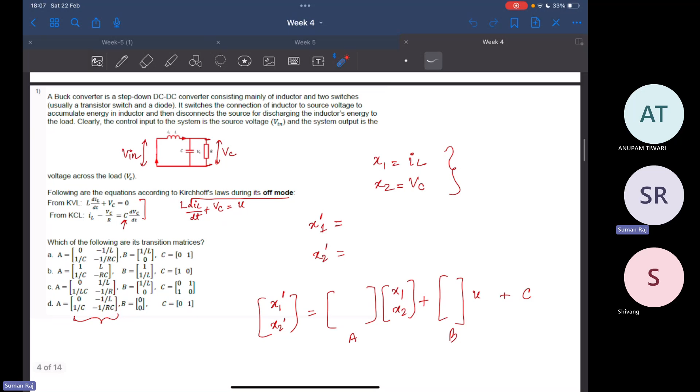Can you show the last assignment, because then we have to log out and then log in. Yes, here it is. Were you able to get this one right? This was from the paper that I had shared. Yes, ma'am. This is okay. Okay. How about this?

This, ma'am, I got wrong, because I said it is displacement, acceleration, and speed of mass. However, there are only two variables for energy stored. Right, we discussed this. Two variables are there: one is displacement, one is speed. Not acceleration, sorry, speed. Right. So this I marked wrong, but I understood after that. Okay. That is good at least.

What about this? This one is also wrong. That also is okay, I can now point out what is the error. Next one. This is also okay. This is also okay, ma'am. All right. Next. This is also okay. Yes.

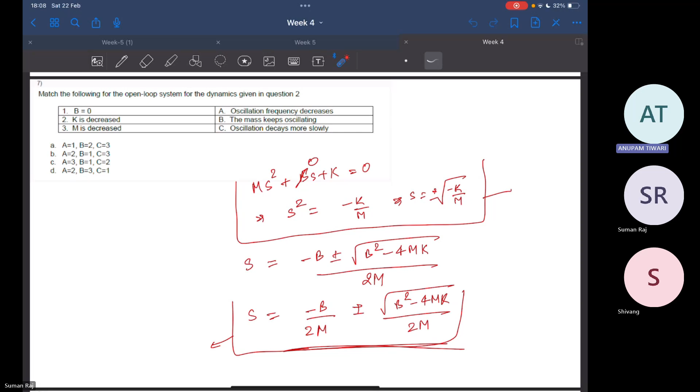Oh, both of you got different answers. Okay, let me check what is the answer that NPTEL says. Give me 1 second, I'll just check it. Week 4 quiz. Second last. 16. You got 16, right? And how much did you get, Anupam? 151. 161. 160. Okay, I think there could be some calculation mistake.

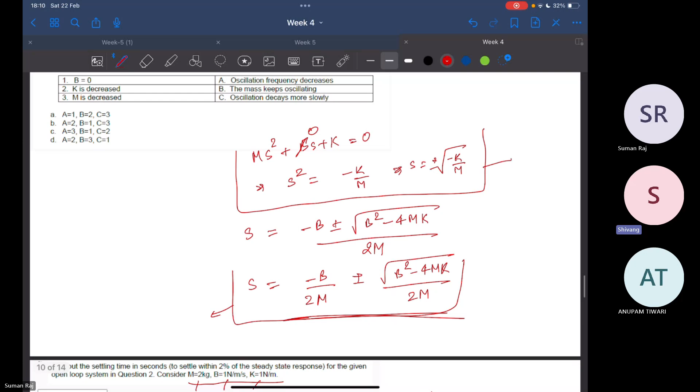Let me check. So this zeta value you actually take from here, right? What was the correct option in this question? Number 5. It was C, right? So let's see, under root k by m. Ma'am, I think it will be better if you just do it by comparing with the below thing. You don't have to calculate two things. S square plus 2 zeta omega s plus omega square. So 2 zeta omega is equal to that thing that we calculated there from the equation. This one you are saying? Yeah. So I used the equation and I just calculated from there only. You mean this entire part directly? Yeah. Okay, okay.

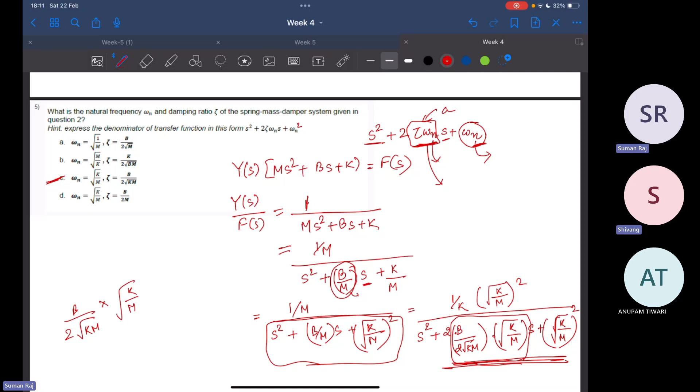So, ma'am, tell me one thing. Now, mass is in kg. So, yes.

What I converted into Newton. So that is why my answer is 10 times more. Oh, you don't have to. All these are in SI units only, right? I did that wrong. I multiplied 2 into 9.8. So no, you didn't have to do that.

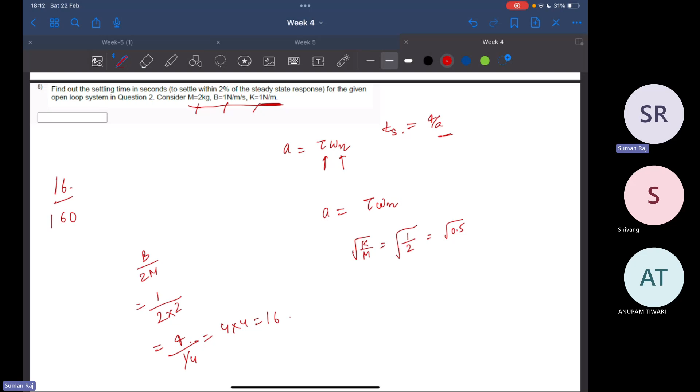Okay, I understand. Maybe you made it like mass into acceleration, like force. But over here also it is 1 Newton per meter, right? I converted kg into Newton, ma'am. 1 kg is equal to 9.8 Newton. Okay, okay. That was not required because over here also in this equation, we directly use what is there.

Next question, ma'am. It is just an error. Okay, sure. This is fine. Ma'am, this I could not solve. Okay. Shivang, you were able to solve? Yeah, ma'am. I was able to solve, just by the hint that you given, that I have to take the input, the state transition matrix for 1 by M comma 0. Hmm.

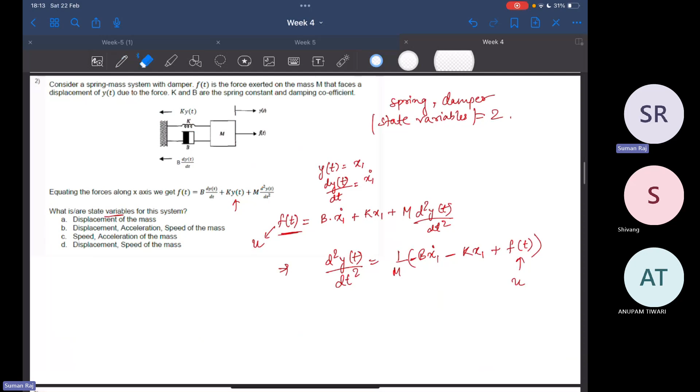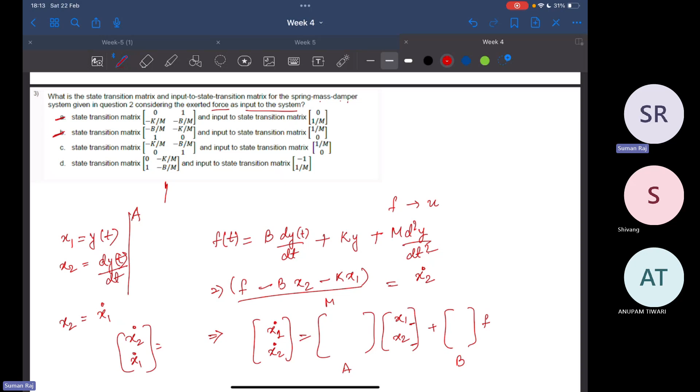Okay, so A is coming from our first, like this question number 2, right? So for question number 2, you were not able to get this right, and then that question got wrong. Okay, fine. So either A or B is the correct answer over here. So if we take 0, 1, minus k by m, minus b by m, right? And this is your B, I guess.

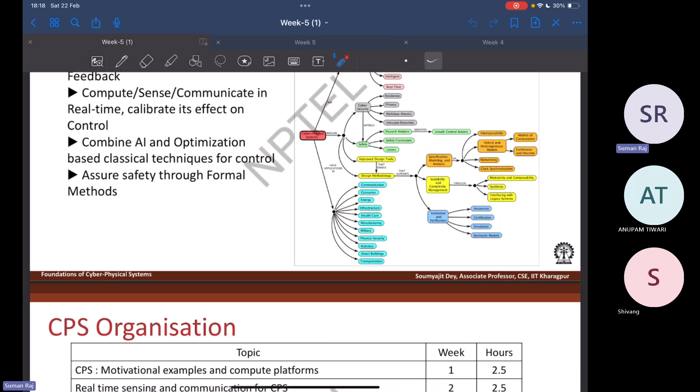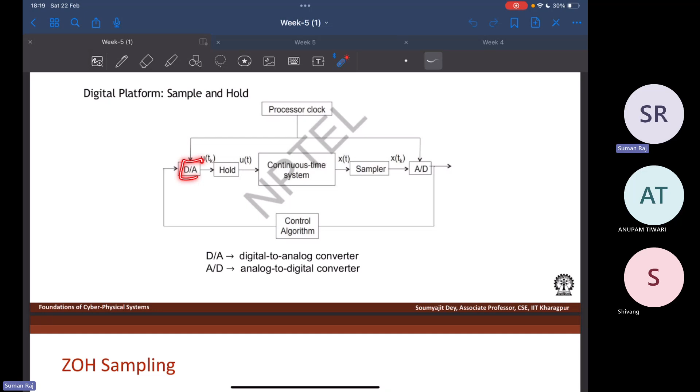Okay, so one thing is about this sample and hold circuit. So what happens is over here, let's say you have this analog signal, okay, and then that analog signal is held for some time, and then it becomes this continuous time system.

Then it goes to a sampler which takes this analog to digital. So what is actually happening is, let's say over here, this example is shown. Let's say this was your initial input. Now when you want to use your sampling, let's say this is the interval of sampling. So you want to sample over here, and over here.

So what happens is at the time you want to sample something, your system will just continue to have that value only. So this entire part until you extracted the next sample, for you the data point is the earlier sample, right? So in that case the values remain constant until you get the next sample from your input signal. So that is what is going on over here.

So this is called a zero order hold sampling, and this is a piecewise constant function. So over here this says that u of t, so this is u and this is x, and this is x of tk, which is continuous input, this is sampling at the tk time step, and then u(t) is your output.

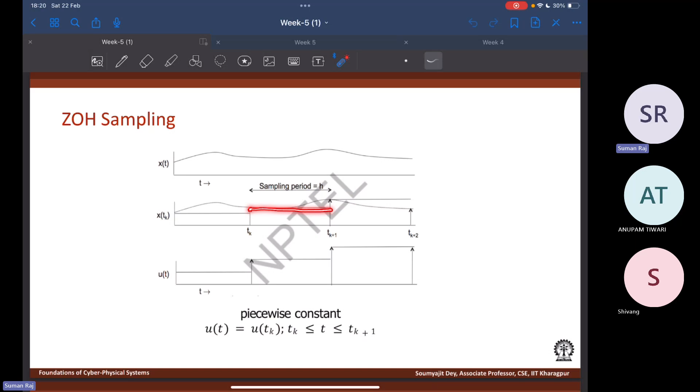So this is actually u of tk between tk and tk plus 1. So between tk and tk plus 1, whatever was your value, it just retains until then. Okay, so this was the concept of sampling.

Now, let's say d phi by dt is equal to A phi. So how do you represent phi? Phi is represented like this. Again, very simple thing. And phi of 0 is equal to the identity matrix. So e to the At is given as this. Can you tell me which formula is this? Taylor series. Yes. So this is your Taylor series.

All right. So now, given these kind of equations, we would have these for any kind of model, and you want to get the state space model out of it. So for any of these ODEs, we learned in our 11th, 12th class for integration that for any formula like this, you first calculate the integrating factor. Over there, we used to call that integrating factor, and now we call this multiplication factor, which is the same thing.

So that is calculated using this formula for any differential equation of this type. Similarly, over here we substitute this equation and this equation, and then we try to find a solution for that particular equation. I won't go in details, but I'll just cover that part. Now, the value of this u(t) changes only at every sampling period. So u(t) is equal to this for t between one sample and the next sample.

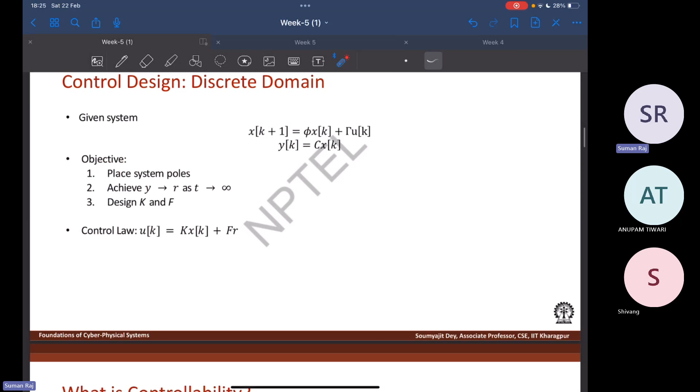Let's see, yeah, this controllability and observability. So in controllability, we say that a system is considered controllable if for any initial state x of 0, a control input u(t) can be designed such that within a finite time t, the state of the system reaches any final state x of t.

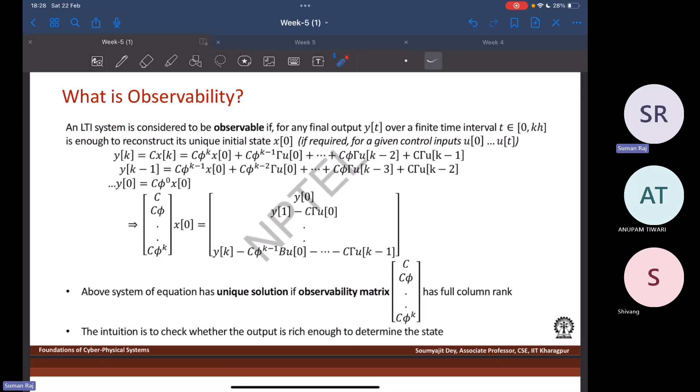Again, for the same thing, you just construct this particular matrix and check if it has full column rank or not. If you have that, then your system is observable. Some of these formulas are actually used directly in the assignment, one is directly there.

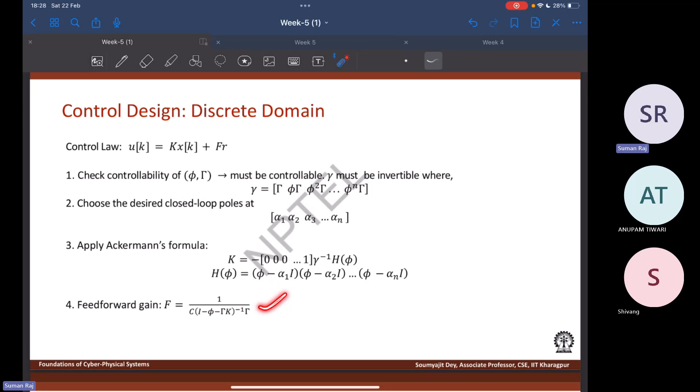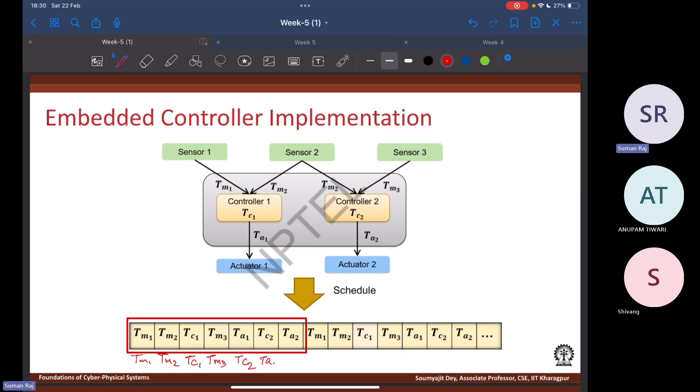The other that is also possible is, let's say, TM1, TM2, TC1, TM3, TC2, TA1 and TA2. This is also a feasible schedule. Okay, so this is how it works.

But if you want to say that this is how it is going to work, then you can assign that also. So if you are reading these two sensors and then you are calculating something out of it, then you are reading the third sensor, and then you are actuating it. But over here again, as I said, it's not depending on anything from your U1. So even if this TC2 comes over here, it doesn't make a difference. Okay, and then you have this actuation and then it goes back to the same stuff.

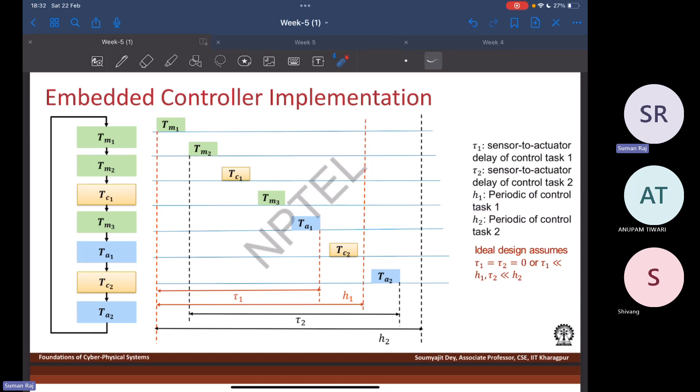Now again over here there is something called the concept of task triggering. So have any of you heard about event triggered designs or something like that, or event triggered mechanisms?

Yes ma'am, in industrial engineering, I will give you an example. Suppose temperature reaches certain degrees, then the actuator will switch off that valve, like that. So once that temperature is reached, then that will trigger the other mechanism. Correct. Yes, that's what is event triggered.

So now over here, what we say is that TM and TA consume negligible computational time and they are time triggered, right? TM is like sensing and actuation, but the major thing is this TC. Okay, so this TC needs finite computation time, which is basically your computing, and is event triggered and preemptive. So this is time triggered because you can say that I want sensor data at this time point, or basically your samples, right? But unless you have your sensor data, you cannot start a compute task. So that's why this is saying that this is event triggered, because this is going to start only when this comes in, right? And when multiple tasks are running on a processor, you can be preempted by a higher priority task. That's what we have studied earlier, that if you have different IDs of tasks, the one that has a lower ID gets the higher priority, and that is just for the CAN bus, but there can be different kinds of priorities for different things.

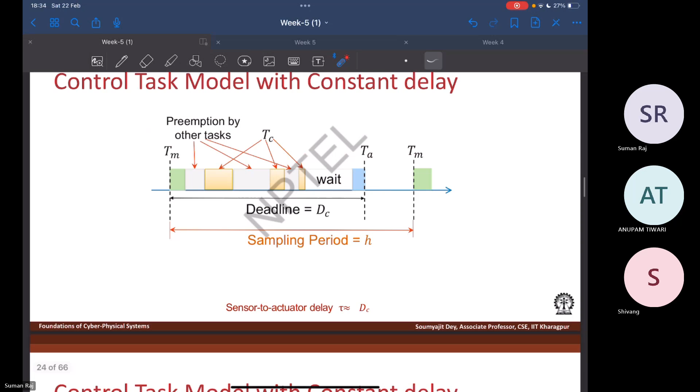Okay, so there can be some with constant delays. You can go through it, but we'll come back if there is any question related to this.

Signals defined. Yeah, I think we can go through this one.

So let's say this is your x of t, like this, the wave, and these are your sampling periods. Okay, so at this point, when your wave was at this, so you are retaining this value. Okay, now again you sampled over here, the value reduced, and then you sampled over here. All right, so now, based on this, you have a TK, you have a TRK, and then you have a TK plus 1. All right, something like this. So this is your deadline of the task, computation task, I think. That's what is DC, right?

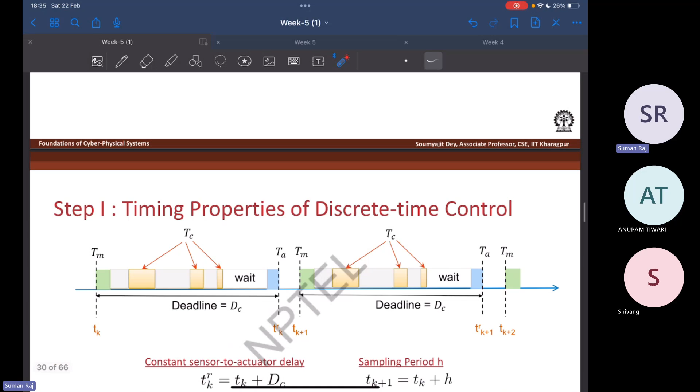DC is supposed to be, I guess, the sensor to actuator delay. So your deadline is equal to the sensor to actuator delay.

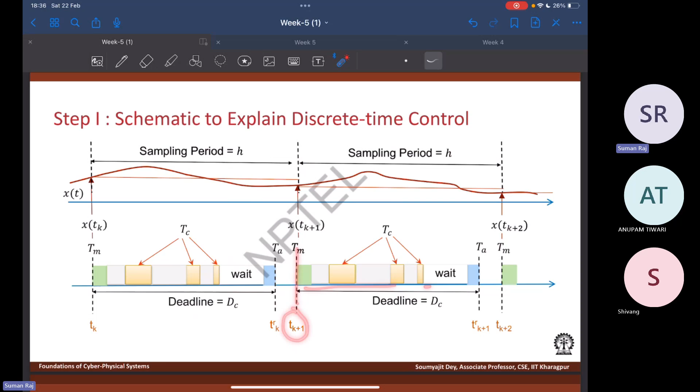So this is your actuation time and this is your sensing time. In between you have your computations, and then you wait for some time before you actuate your actuator. And then at the next time you get your sample and then you do all this. This keeps on going.

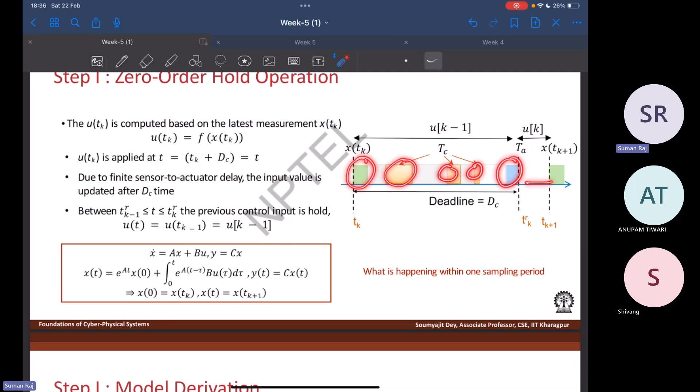In the case of zero order hold operation, it's the same thing we studied in the first two slides - whatever is there for the previous step, and then this is for the next step. That's how we put it over here. This just shows what is happening within one sampling period: you have sensing, different computes, an actuation, and then there may be some waiting depending on how heavy your compute is and what kind of device you are using.

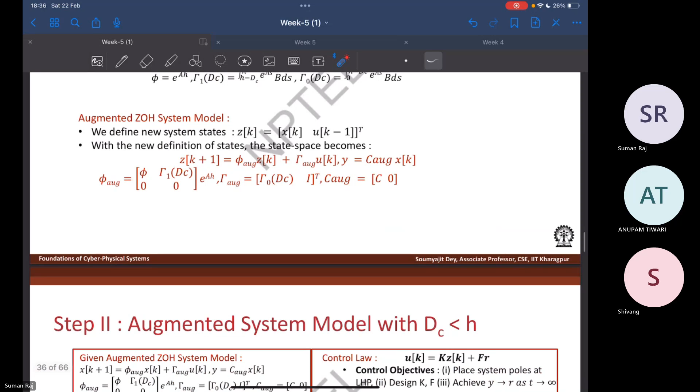Okay, so these are fine derivation, we can skip. What all is there? Yeah, this is probably required.

So let's see this augmented system model where you have the delay less than your sampling period. In this case, what you do is your x of k plus 1, that is equal to phi of xk, plus this is your gamma one, and then plus this is your gamma naught. And then you have y is equal to this.

But when you want to augment that particular system, you say that your z of k is equal to x of k and u of k minus 1 transpose. So that comes from here. With these new definitions, you just change the state space, and then that's how you redefine the variables.

I think there is one question specific to this particular slide, because the question is asking what is the feed forward gain or something like that. We'll come back to this because we anyways have to go through it.

And then again over here, let's say you have a continuous time system, and this is your state space. So you have x dot is equal to a of x plus b of u, right? And y is equal to c of x. So this is your a, this is your b, and this is your c, right?

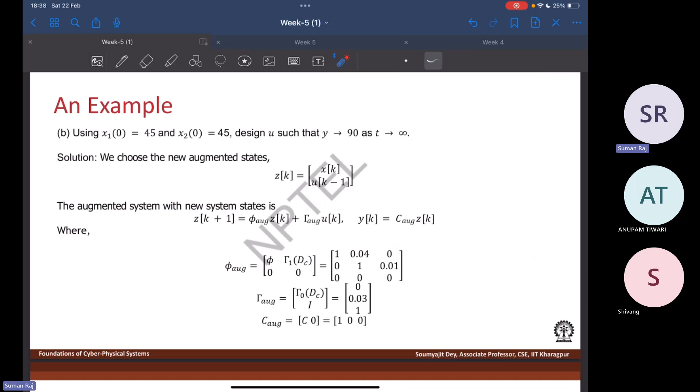That's your system model, and then augmented states is calculated. I think we should just keep it for now. These are all examples. Okay, let's go back to the question.

So any doubts up till here? Something that you want me to discuss specifically before we start discussing the assignment?

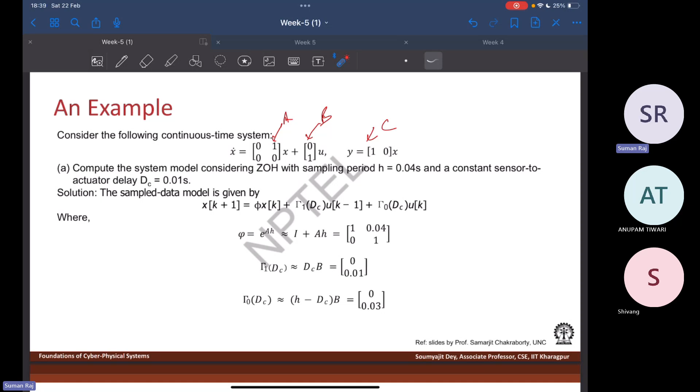Okay, if there is nothing, let's go to this. So this is another question. Last time we had buck converter, right? DC to DC.

Similar to this, what we have to do is we have to take one variable as the current in the inductor and the second variable as your voltage on the capacitor, as these two are your energy storage elements. Depending on this, let's see what we can do.

So there is this very nice article. I would suggest you to go through it and maybe save it. Over here, probably go specifically to this question number, example 3 on page 9.

So that's a slightly changed circuit. You have a resistor, you have a capacitor first, and then you have the inductance in the PDF that I just shared. Are you all able to open that link? Yeah.

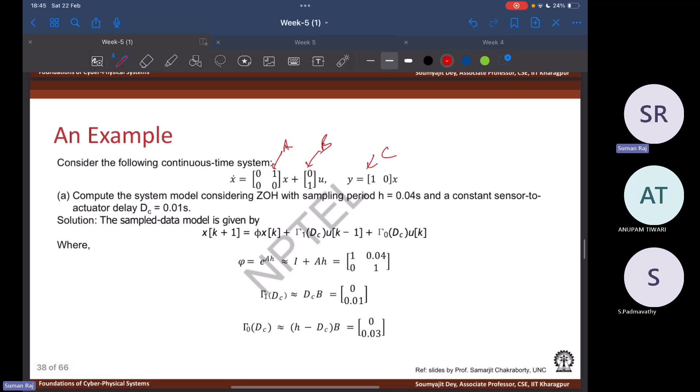Let me just check one thing. Continuous time, state space. So that is given by

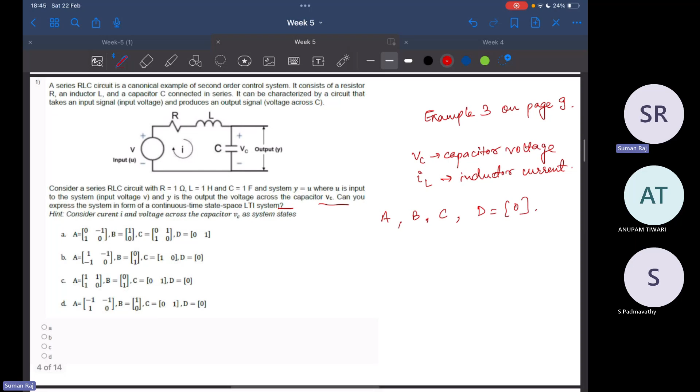Okay, so the next question says: discretize the above system for a sampling period of 100 milliseconds, and which of the following represents the state space of the series RLC circuit system. So it is for the same question, but we have to discretize it now. So what do you have? You have x dot is equal to Ax plus Bu, right? And what was the equation of your phi?

It is actually from here only. So this part. Okay, so this is your e of At. So your phi is given as e of At, which is nothing but I plus At plus A square t square by 2 factorial, and it continues, right? And then this is B by A, e to the power Ah minus 1, right?

So now, what is your sampling period? It is 100 milliseconds, but in terms of seconds it is given as 0.1 second, right? So you will calculate your gamma first. e to the power 0.1 into A minus 1. Yeah, so I think if you just go through slides 8 to 11 exactly, that's where it will solve this for you.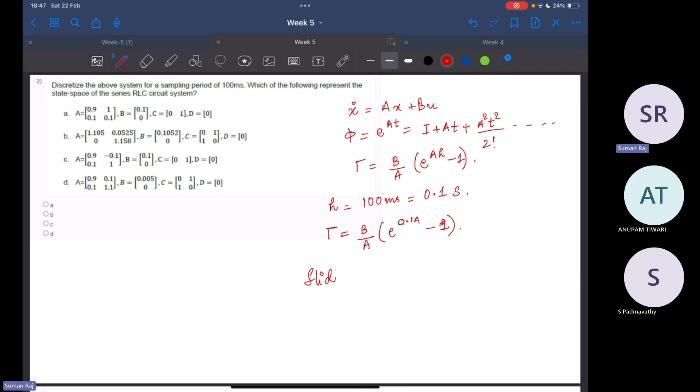Okay, this week's assignment is a bit tough, and you would need to refer to the lecture again and again because it's more like mathematics and all those equations are involved. So you would have to go through each step over here. So in the case of this x dot, you need to get this multiplication factor first, and where will you get this from? You get this from question number 1's answer.

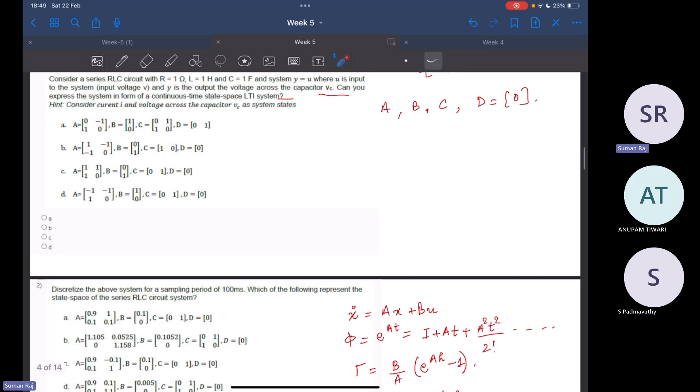This is slide number 8, 9, 10, and 11. Okay, so that's how you discretize your question. So you have to put it in this format. And gamma we can take approximately B into h? B matrix into h, yes, you can do that. So I think whatever B you got from here, you can just multiply that by h and you can get the answer. Is this okay? Yes. Okay.

So let's go to the next one. It says given a final state of the above series RLC circuit system after t units of time. So after t units, you got to a final state. Okay, so is it possible to conclude a unique initial state for a sequence of input signals? So what does this definition talk to you about? It talks about controllability,

right? Because over here we say that you have x is equal to 0 at t is equal to 0, right? But after a certain point in time, you reach your final state. Like this is your final state. And this time is actually a finite time, right? So over here the question is the same. You have a final state after t units of time, and this t is your finite time. So is it possible to conclude this?

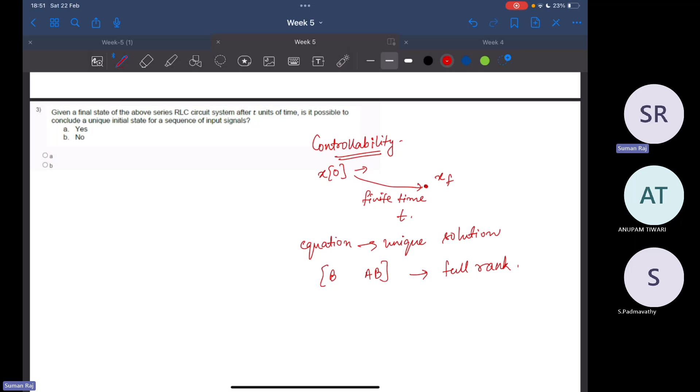So if the question says, is it possible to conclude a unique initial state, which means that the equation should have a unique solution. And what do you mean by unique solution? It means that the controllability matrix, B AB, should have full rank, right? So you would need to calculate on that basis.

So you get the B from the above equation, like this one over here, and you get the A from the top, and then you multiply that. So the first one will remain as it is, the second one will become AB, again a 2 cross 1 vector, and then you have both of them, and then you calculate what is the rank of that particular matrix. Okay.

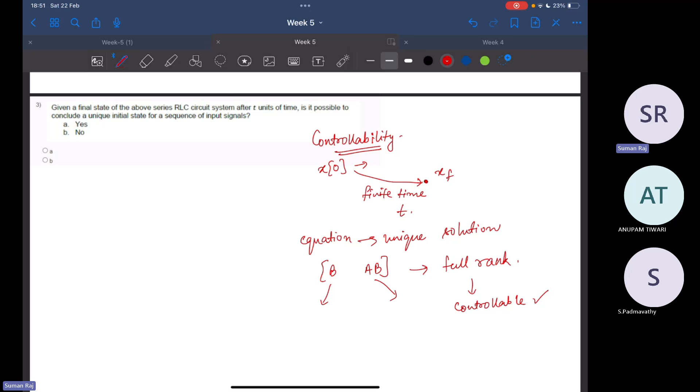I mean, this we have to take the first one or the discrete one? Take question 2. Hmm. I would say take question 2.

Or maybe try with both if you are very doubtful. Okay. No, because the time t is continuous, so it is not tk plus 1 or tk plus n. So I think one will be okay. No, but it says t units of time, right? There is the concept of units. Okay, we will try with both. Prioritize whatever you get from question 2, and then check with question 1 also. But very likely you should be able to get your answer with question 2.

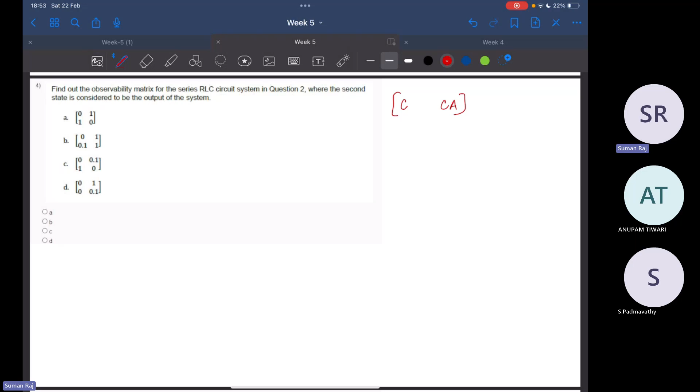Okay. So again, the same thing. You have to get the observability matrix for the series RLC circuit in question 2, where the second state is considered to be the output of the system. So here you have to get this C and CA. You have to get the transpose of that. Okay, no, this is just the matrix. So you just calculate the matrix of this. This is your observability matrix.

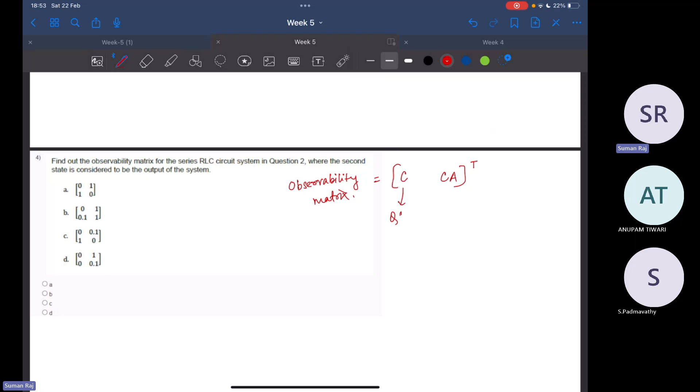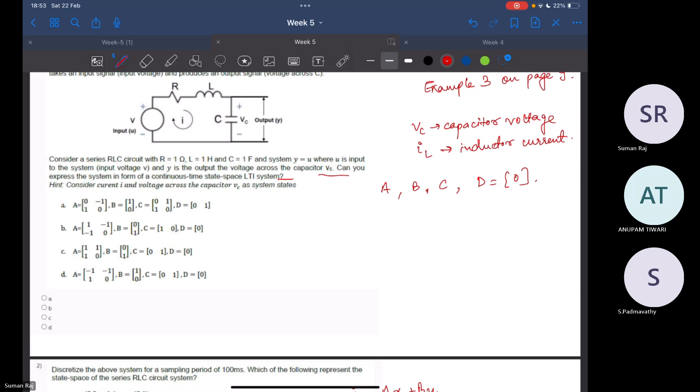So C will come from your question number 1 because it did not change in question number 2, right? When we were changing it. So over here, I think C and D don't change. It's just that your A and B only change. But just confirm once when you solve it. Okay. So your C and D will come from question 1 directly. And this A comes from your question 2.

Okay. So let's see this. Consider the following trajectory tracking control system for a vehicle of mass m that tries to minimize its deviation x from a certain reference distance by exerting certain input force u to overcome the equal amount of force inflicted due to friction. But due to the wind drag and rolling resistance, the vehicle faces a backward resistive force Bv, while the vehicle moves forward in v velocity due to the force applied. Obviously, the equations are simplified and complexity that arises due to powertrain is omitted. So you have been given a mass and a b, so you have to find out whether your system is stable in open loop or not.

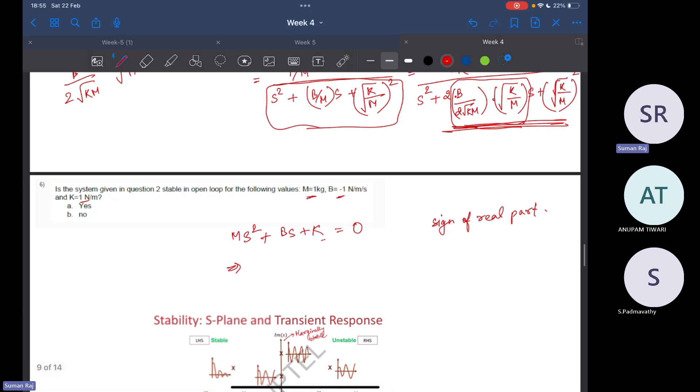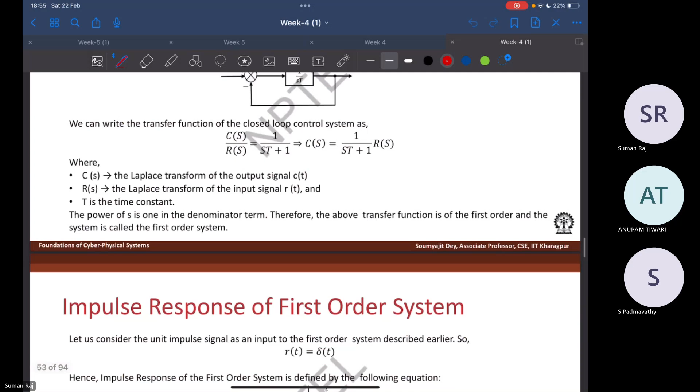Have you seen this equation somewhere? We solved this in the last lecture, right? Let's see where this is. It was a similar one. Okay, I don't think the car one is here. It was probably in the week 4 lectures. Let's just check once. This is the same question, right? So what is the slide number 9?

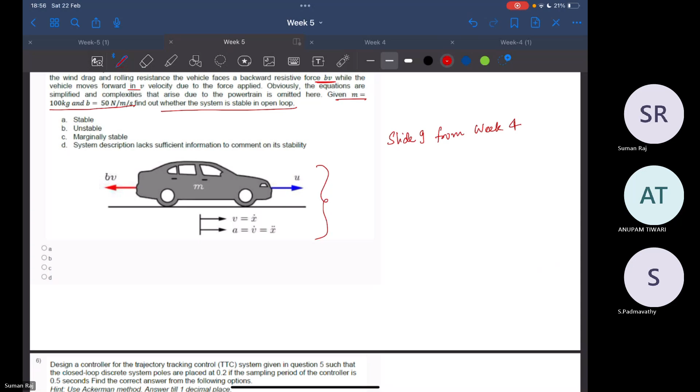Okay. So what happens over here is the same thing. So you have Bv, which is the friction force. Your mass is m, and then you're going at a speed of u. It's the exact same thing, right? So now that you have these equations, let's see. So your equation is mv dot plus bv is equal to u. What is the other one? Your y is equal to v, right? So now you have to just check if your system is stable in the open loop.

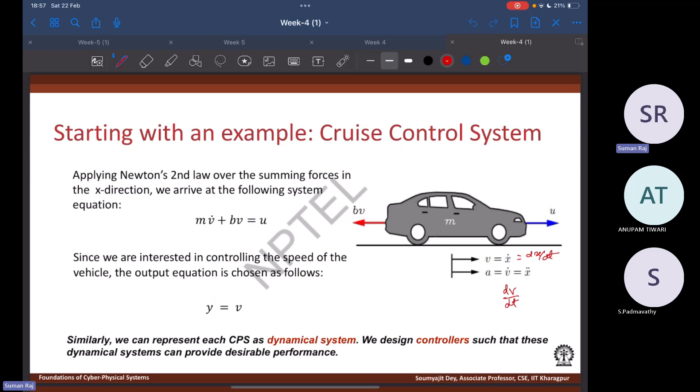So by stability, what will you have to do? You will have to go through this Ackermann's formula, right? Or maybe let's just see. So if this is your mv dot, which is basically mx double dot plus bx dot, that is equal to your u, right? And given this equation, last time you already solved it. It is probably here somewhere. Should be in your notes. Okay, so what do you have over here?

Your x1 dot and x2 dot, that is equal to 0, 1, 0 and minus b by m, times x1, x2 plus 0, 1 by m of u. Okay, and then your y is equal to 1, 0 of x1, x2 plus 0 of u, right? So this is how we got it. And over here, what do we say? My x1 is equal to x and my x2 is equal to v.

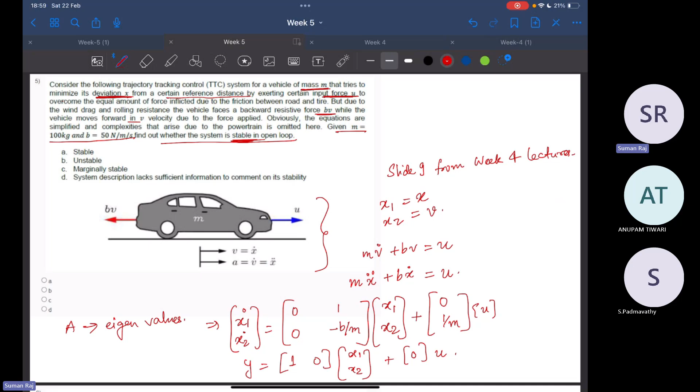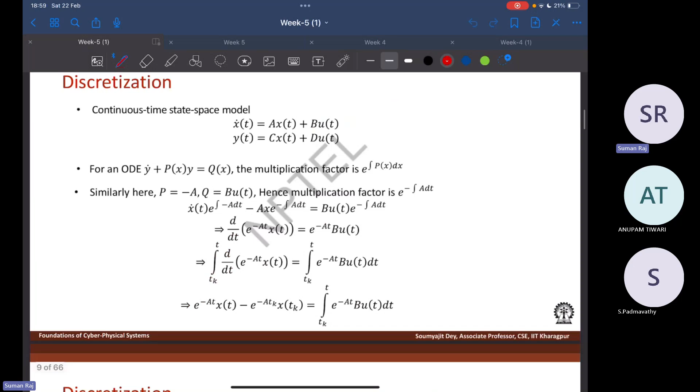Okay, so if this is your equation, you can try and get the eigenvalues for your equation. So get the eigenvalues of A and try to see what is the value of those roots. Okay, and then once you have that, try to do this circle analysis that we had. Where was that? It was somewhere here only. Yeah, this one. Okay, so then you do this discrete time system analysis and you should be able to get the answer.

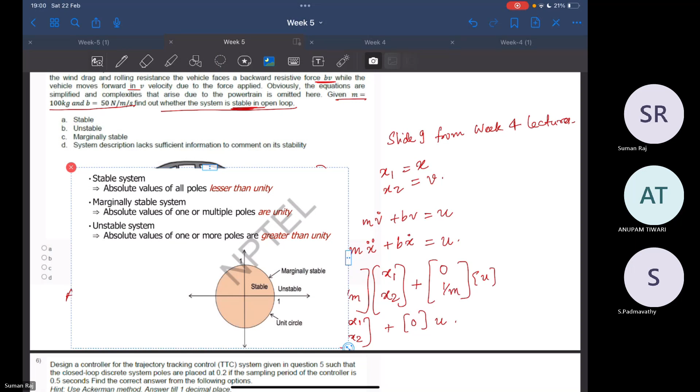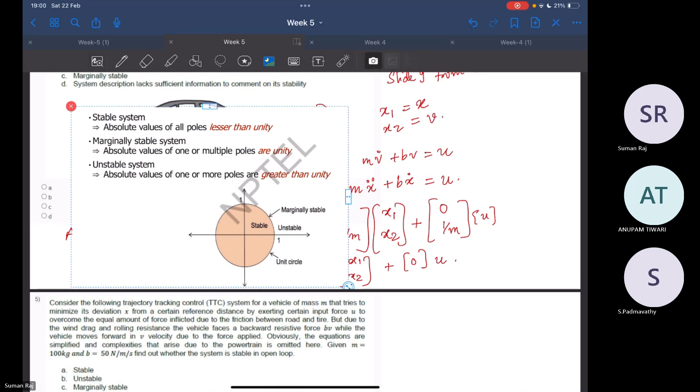Okay, so I'm putting it over here. Is this okay?

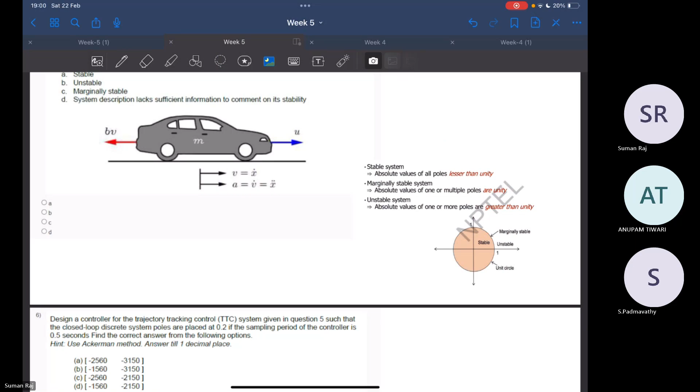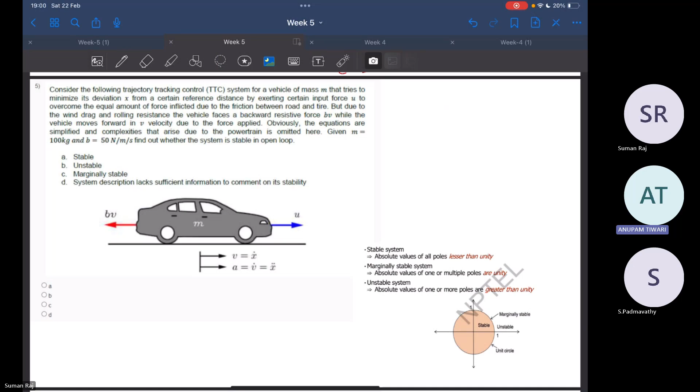This is an analog system. If we take A, what you've decided. So with A we can calculate whether this is stable or not. Yes, if we say A is 0, 1, 0, minus 0.5, so we have to calculate these eigenvalues. If they are less, then it's stable. Correct, yes.

So once you get your eigenvalues, then you get the max of lambda 1 and lambda 2, and if that is greater than 0, then this is going to be unstable. All right. Yes. Okay.

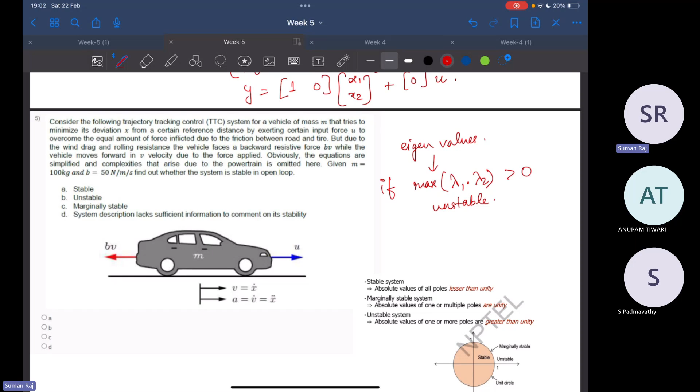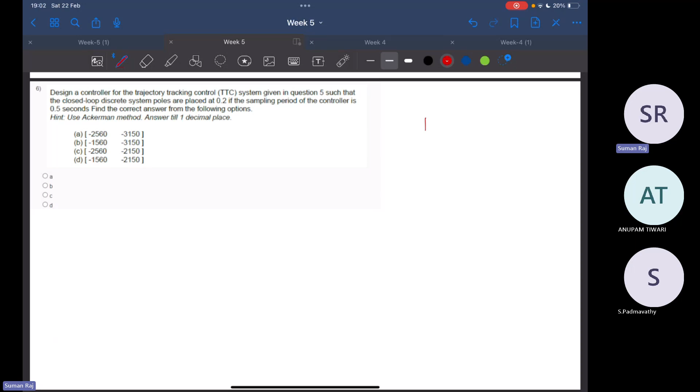Okay, so let's go to this question. It says design a controller for the same system given in question 5, such that the closed loop discrete system poles are placed at 0.2, if the sampling period of the controller is 0.5. Find the correct answer from the following. So what do we have to find? We have to find K.

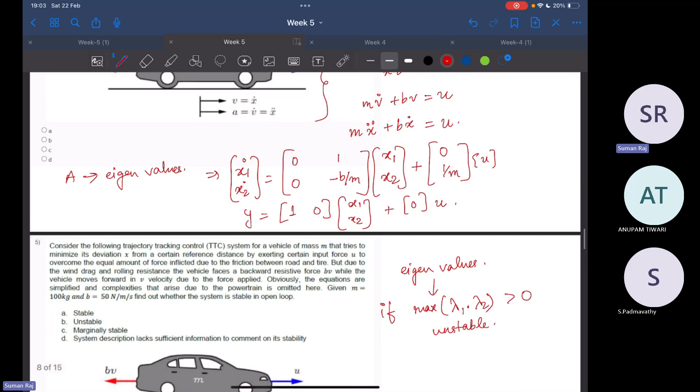Okay, no problem. Let's see how we can go about it. So you have x dot is equal to v, and v dot from m into x double dot plus b into x dot is equal to u. So you would get minus 0.5 into v plus 1 by 100 into u. If you write that in this format, it is 0, 0, not minus 1, it should be plus 1, minus 0.5, for x and v. So your A is this and your B is this.

So now when you want to convert it to the discrete time system, your sampling period is 0.5 second. Then your B in discrete time will be given as well. All these are given in the first few slides of the lecture, so don't worry about noting this down. So your ATs is going to be 0, 1, 0, minus 0.5 times Ts, which is 0.5, so this becomes 0, 0.5, 0, minus 0.25.

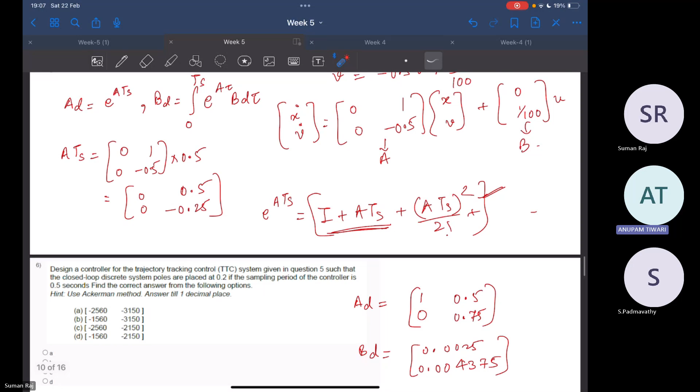Ma'am, BD matrix is 0 and 0.0025? BD matrix is not readable. Yeah, BD matrix is here: 0.0025 and 0.004375. When you use Ackermann's formula, you substitute the pole that you have, substitute this A and B, and then get the solution from there. Okay.

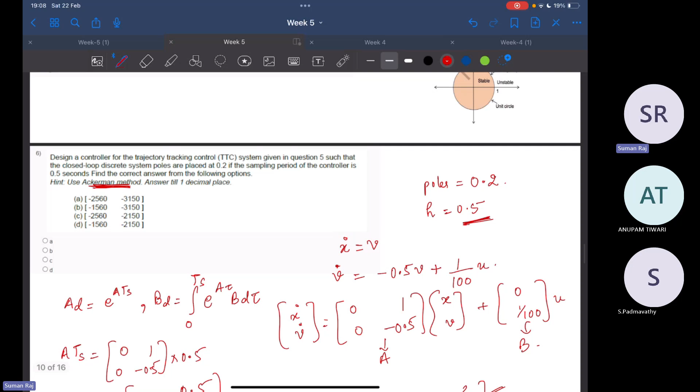Give me a second. Your mass is 100 kg and your b is 50 Newton per meter per second. Probably you might get something which is this divided by 10, so just check that once. Probably they have a decimal over here, because when I solved it I got less, divided by 10. That would be one of your answers.

Is that okay? After this AD and BD, what to do, ma'am? What is the next step?

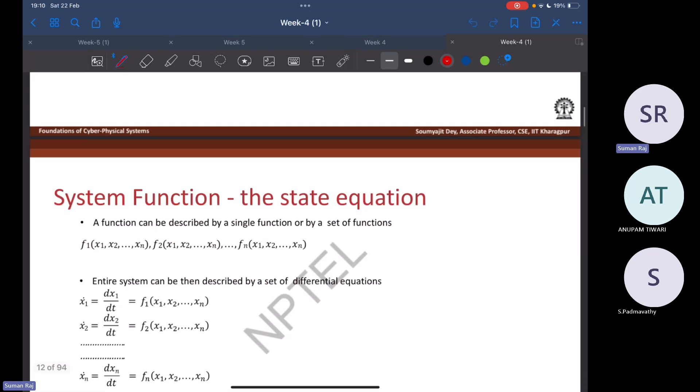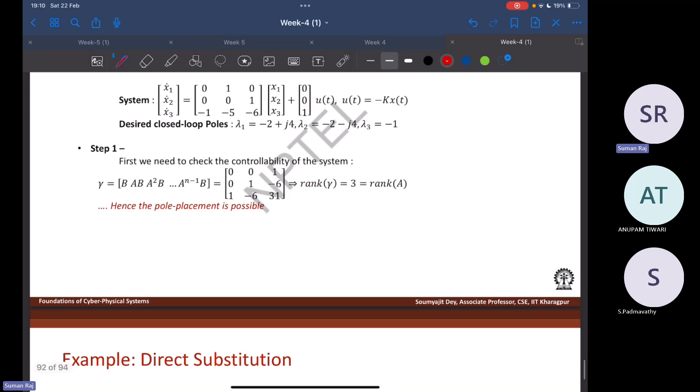Ackermann's formula. So go through the last lecture, the last slide probably, around the end of the last. I just pointed. Yeah, there were two steps, right? One was direct substitution and the other one was this Ackermann's formula. So if you already know the roots, like the poles, then you actually go through this equation. Okay, you substitute that and then you try to find out the answer.

This is for, what you say, analog system. So we have to convert into digital system, this formula? No, you don't have to do anything. Just a second. So this is your K, for which you took all the eigenvalues. No, I don't think you have to convert anything.

I'll write the formula for you if you want. So you have to calculate your K, right? And these will be your lambdas for this particular equation. Okay, so get that, and then similarly over here, you have this inverse, right? So you would have inverse of B comma AB. Okay, and then what do you have? You have h of A, and what is your h of A? A minus lambda I. So you will have A minus lambda 1 I into A minus lambda 2 I.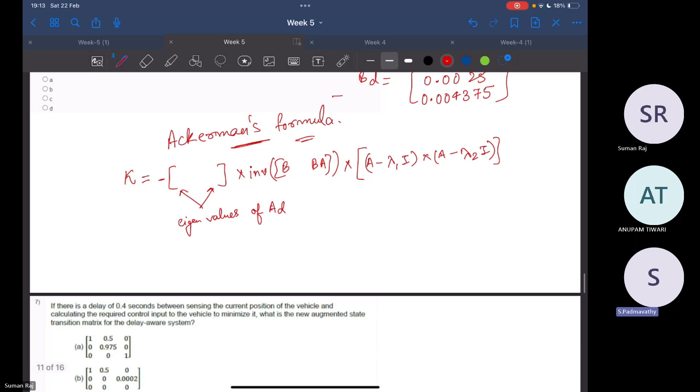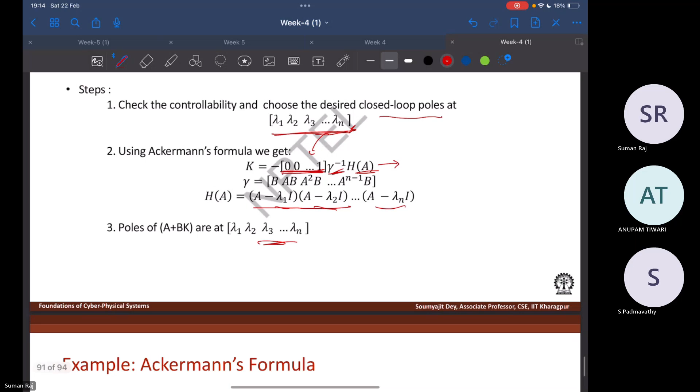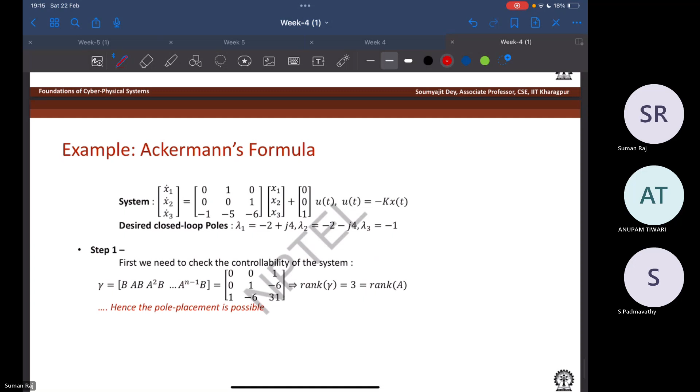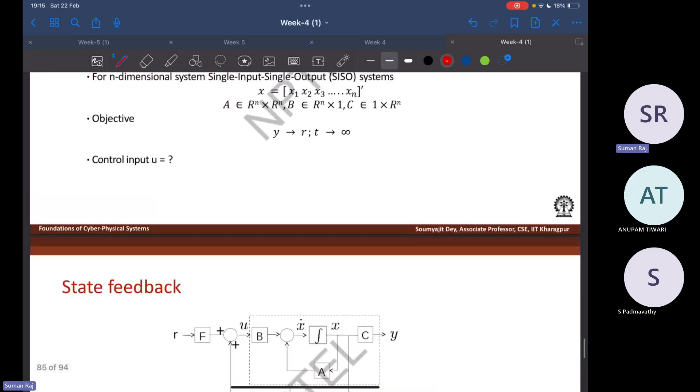No, these are eigenvalues, right? Just a second. I don't think these are poles. These should be the eigenvalues, but just check once. Zero, zero, one. 001, ma'am. 001. It won't be 0, 0, 1, right? This is a 2 cross 2 matrix. There will be only two eigenvalues for that particular matrix. Is this okay? Should we move ahead? Yes. Okay.

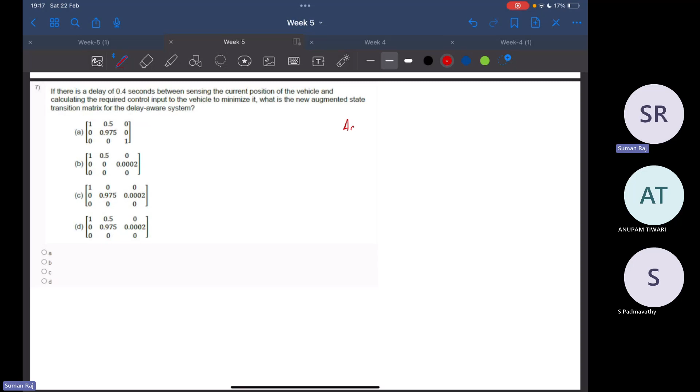So the next question is, if there is a delay of 0.4 seconds between sensing the current position of the vehicle and calculating the required control input to the vehicle to minimize it, what is the new augmented state transition matrix for the delay aware system? So what did we have as our AD? 1, 0, 0.5 and 0.975, right? This is what we have from here. So now you want to augment it. So we actually saw one formula for augmented matrix. Let's see. Do you remember where it was?

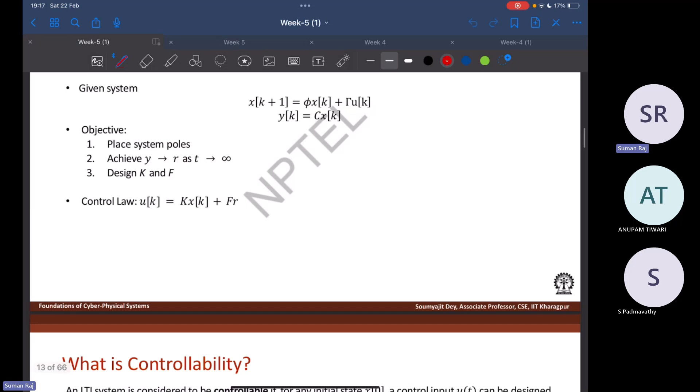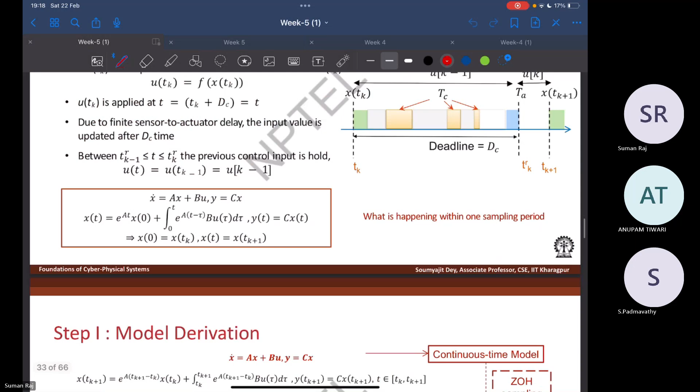Yeah. So this is DC that we have. Let me just write it down. So your DC is actually 0.4. Okay. So let's see. So you need to calculate this. Your phi aug is equal to phi, 0, gamma 1 of DC, 0. This is 0.4. And what is your phi? Your phi is actually your AD. Okay? So that way you calculate. I think you should be able to get the answer.

So this portion will be your A. Then you will have 0, 0. And then this will be your gamma 1 of DC. And then you will have another 0. Yeah. Try to calculate using this. You should be able to get your answer.

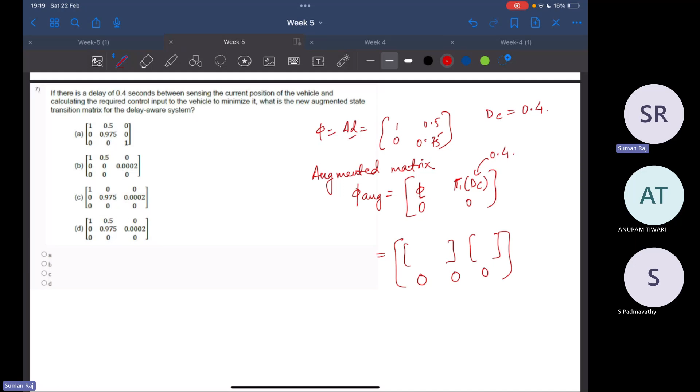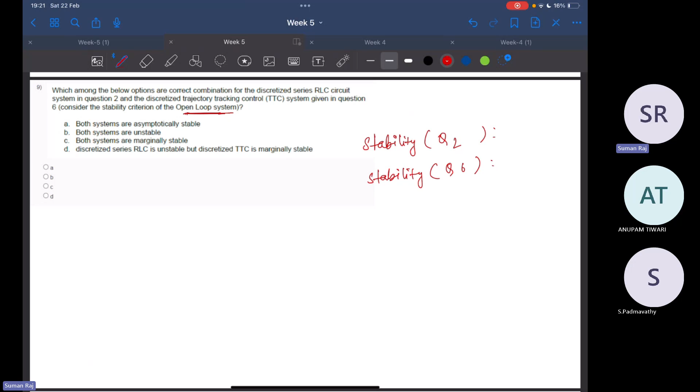And using both of that, you can just check whatever is the option. So open loop system, you just check what was the stability for these two. But just make sure that you have the discretized series. I think one of the answers you already have because we calculated that over here, in this part. So you can just get the answer from there.

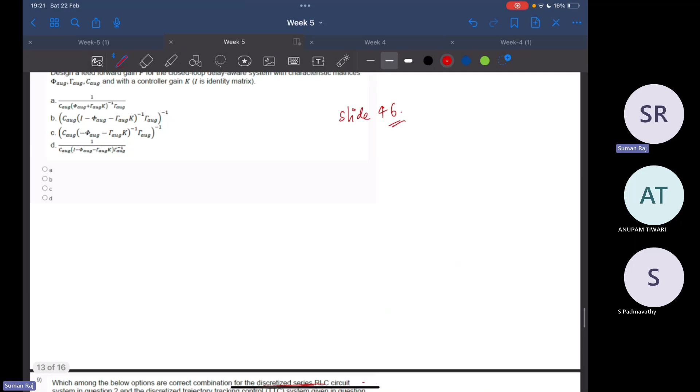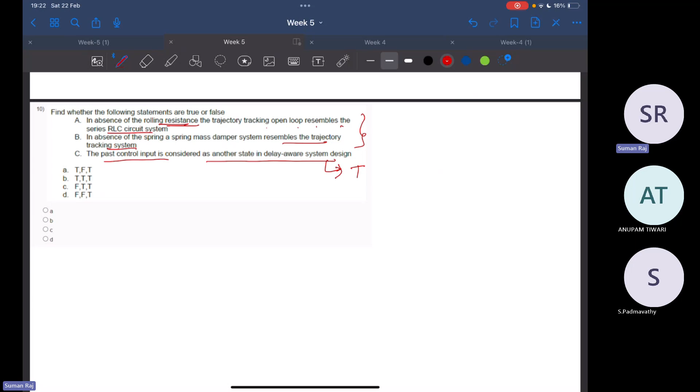Fine. So for these, try to see that if you remove one of the variables, what happens to your system. So you just have to tune the parameters. Like let's say over here, if you have the R, you just put that as 0 and see what happens to your system. Like how does A look like for both of them? A, B, C, simply all those things. Okay, so I think this is it. But if you want me to discuss anything else, please feel free to do that.

Who is the other student? Ma'am, Shreyash. Hello. I think Shivang was there earlier. Get Shivang's number. Number I won't have. I actually don't have any students' contact also. Maybe reach out to him on LinkedIn if possible, because even I don't know. And if he was here, he could have responded at least. Actually, I don't use LinkedIn or WhatsApp. He just left the chat, so we don't have access to his email ID. Can I get your email ID? I don't have access to that. You can either check with NPTEL or reach out to him separately.

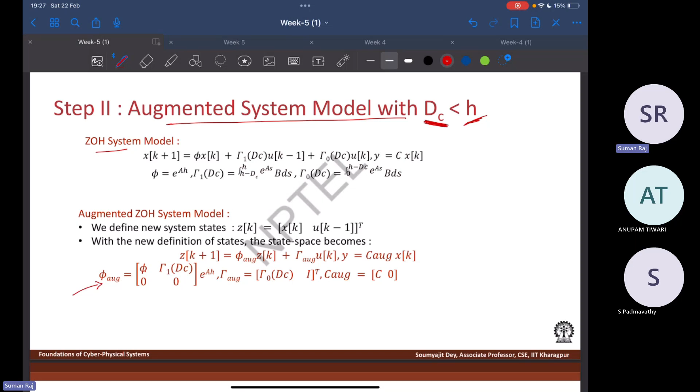It is this one by I.J. Nagrath and M. Gopal. So that's a very famous book, and most of the control systems part is taken from there. But since only a component of the course is that book, I would not suggest you buy it, and you can just get some PDFs for the particular chapters that are over here.